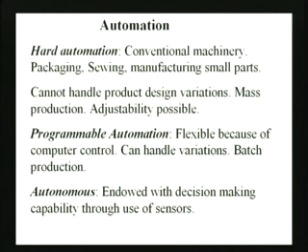These autonomous systems are endowed with decision making capability, and that is a very important thing. You would like the machine itself to take a decision rather than a human being continuously interfering and resetting or changing whatever it is. If there is a fault, the machine itself detects and corrects itself. So, we have slowly reached this high level of automation, and we are tending towards living beings.

Animals have a certain degree of autonomy. When they move around, they see food, they move towards it; they sense the presence of food or a threat through several ways, through sight, through smell, and so on. And they react to the environment and do what they desire or what is best for them at the given moment.

Perhaps the most autonomous capabilities are possessed by human beings. They are the most advanced in terms of autonomous capabilities. We think and we react, and we can change our actions, we can plan new actions. This is the highest level of autonomy which most of us encounter. Now, where does the robot fall into this? Many people seem to think that robots are like human beings. It is not really so.

We can develop machines which can be autonomous like humans, but do not reach the same level of autonomy. This is because there has been tremendous development in digital electronics and a lot of development in sensors. The marriage of these devices together has made it possible for us to now come out with autonomous devices which are many a time called robots. There is no definite definition of robots.

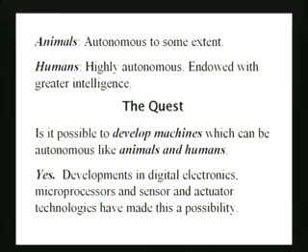I shall now show you a short clip to indicate to you how much autonomy is possible when we have a marriage between electronic systems and mechanical systems. Let us have a look at this particular clip.

Here is a two-wheel machine which is balancing itself. This has been built by an IIT student, and this particular machine uses gyroscopes in order to balance itself. What is the utility of such systems? Such autonomous systems can be used to undertake hazardous tasks.

Painting on the shop floor is a very hazardous task, because you are handling toxic material and it is injurious to the health of workers. Welding is a hazardous task, and also welding is a difficult task. The human being, if he has to weld two pipes together sitting on one side, he has to weld all round the pipe, whereas he is able to see only one side of the pipe.

Then loading and unloading jobs from a press or from a lathe is a tedious repetitive task. This is one more place where robots come in and can handle them with ease. Assembly operations. For example, when you assemble a chip, you have a very fine wafer, silicon wafer, to which you have to solder very fine wires. Lot of precision is required.

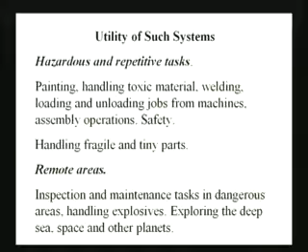Yet another reason for use of robots is safety. When they are handling dangerous material, chemicals, biochemicals and nuclear material, safety is paramount, and robots can handle this material with ease, with smooth operations and repetitively without fatigue, and so safety is promoted.

I have already spoken to you about handling of fragile and miniature parts, fragile parts like vials of medicine. These require careful handling, and that is one more place where robots come into the picture and can do the task with much ease.

Further, you must have all heard of exploration of planets like Mars and others like the moon. Here we need devices to move around, gather samples, do tests and so on. When you want to operate in such remote areas, it is very easy to use robots and undertake the task.

Even for terrestrial applications, there has been recently use of robots for exploring volcanoes, for exploring remote heights in inaccessible places in mountain ranges. All this has been done by robots, or underneath the sea. That is another place where you are all familiar with the Titanic and how the wreckage of the Titanic was surveyed by an underwater robot.

Okay. Now, we have seen all these things. Let us now go over to a few of the tasks I have mentioned. Here I show you a picture of a robot painting a car. The car is sitting on the conveyor. The car does not stop for the robot to paint it. The conveyor moves at a very slow speed and the robot keeps painting it.

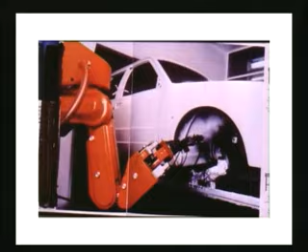You get a uniform coat on all the cars on the conveyor, because the robot has been properly programmed. It repeats the same thing over and over again infinitely. Okay. So, that is one of the reasons why robots are used, in order to get uniform quality and good quality. Let us see a picture of a painting robot. You can see the painting robot painting a car here.

Notice that these painting robots have a high degree of flexibility, in the sense that they can maneuver inside through the window of the car and paint the roof of the interior of the car. These robots can do it with ease.

A worker who is required to do this will have to carry a heavy painting gun, will have to mask himself to keep the toxic gases out of his breath, and there is always the hazard that there would be a fire. Now, painting robots are special in the sense that they should be able to ensure that no fire breaks out when they are acting.

What is the status today of these robots? There are what are known as industrial robots. That is the one like the painting robot you see. There are robots similarly in industry which load and unload what are known as presses. These are very hazardous tasks.

In a press, when a sheet of metal is introduced, there have been many accidents where the workers' fingers have been injured by the moving ram of the press, which sometimes comes in, and the worker forgets to remove his fingers in time from the loading point and gets them crushed. There are medical robots which help a surgeon undertake intricate surgery.

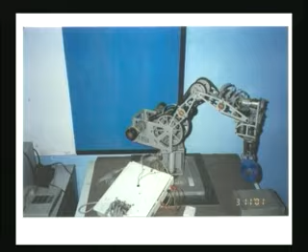In a servo motor the same thing is done by having what is known as a feedback. There are encoders here which provide you the feedback, and as you notice the motors convey their motion to the various joints through a set of chains.

As we go on, we will see how this particular device works. I will now show you a short clip on this particular device. Let me just show you how this device can be used to transfer the contents of one glass into another. Now, it is a clip which runs on for about 1.5 minutes.

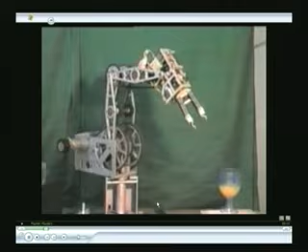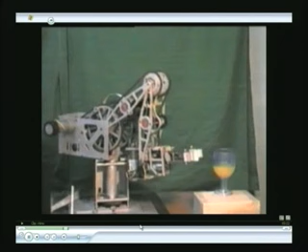You can see the robot, you see the various motions. The robot has got 2 fingers. You see the robot has approached; you have got a glass there containing orange juice. The robot is picking it up by the stem. It is now lifting it up. It is turning around towards us. You watch it, it will turn.

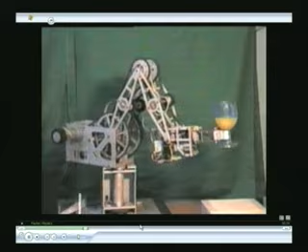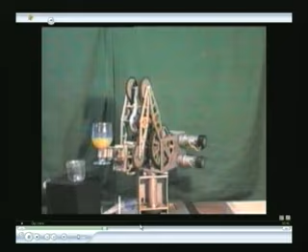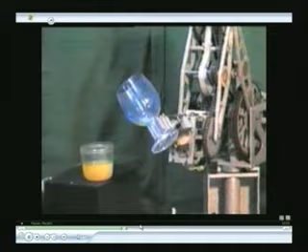It is stretching its arm, goes to that position, then turns, and then it is emptying this orange juice into another cup very slowly. It does not want to spill, and you see there it has completed emptying the orange juice into another cup. Now, it is returning the stem glass to its original place.

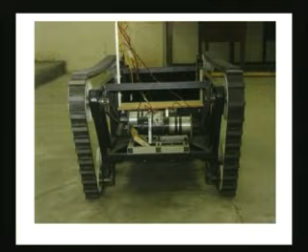So, apart from these robots, we have got what are known as mobile robots. I show you here the picture of one mobile robot, which is a tracked vehicle which can explore uneven terrain. As you can see, a couple of motors driving the tracks through chains. Here is another view, you can see the battery.

All robots more or less are required to carry their power on board. They are not connected through wires to a land source of power in the laboratory or in the industry. Mobile robots invariably have to carry their source of power on themselves. Robots which are stationary, like the Rhino I had shown you, could be powered from a stationary power source, but not mobile robots. So, whenever one designs these mobile robots, the ability to carry a lot of power in a compact package becomes a limiting factor.

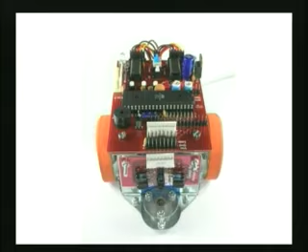Here is another little robot which can follow a line on the ground. This has been built by one of the companies established by our students. This robot can follow a line which is drawn on the ground. You have a white line on the ground and this robot follows it. Whichever way it is, you can draw a figure of 8 and the robot would follow. How does it do it? It does it through a set of sensors which allow it to sense the position of the line and guide the robot accordingly.

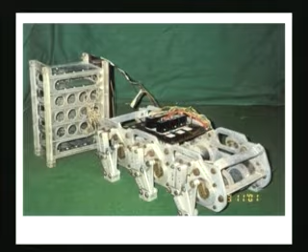Here is what is known as a walking device. Earlier I had told you that walking robots can cross over obstacles, can cross debris wherever there has been an accident, something which a wheeled robot cannot do. Tracked vehicles can, but supposing a tracked vehicle is asked to step over a pipe at a height of maybe 2 feet from the ground without damaging it, a tracked vehicle will not be able to do it. It will damage the pipe, whereas a walking device can step over the pipe and walk off, just like a human being does. Without damaging a pipe, I can cross a pipe.

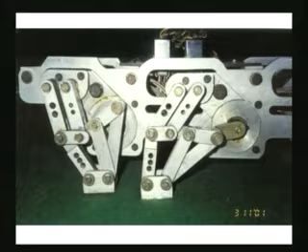Here is one. This is one of the earliest walking machines built in our laboratory here, and it has what are known as single degree of freedom legs. You can see the leg, it is a mechanism. What this mechanism essentially does is permit the leg to lift itself up, throw itself forward and come down. So, it was a single degree of freedom leg. There were 6 legs in the machine, 3 legs on this side, 3 legs on the other side, and it had limited capability because it had single degree of freedom legs.

The legs were driven by stepper motors, so we could control them. When one leg is moving in the air, another leg is stationary. Watch how you walk; you will notice that when you lift and throw one of your legs forward, the other leg is stationary. In the case of these 6-leg robots, we have 3 legs stationary on the ground at a time to provide a tripod support, and 3 other legs are thrown forward, thereby we achieve stability.

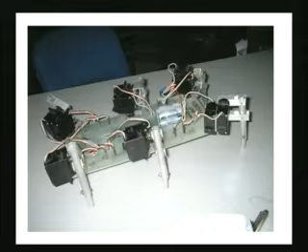Another robot where we have a leg with 2 degrees of freedom, a little bit more freedom than the previous leg. You notice this robot also has got 6 legs. Again we are aiming at static stability in order to keep it stable.

There are 6 legs. You can see the black boxes there. These are the servo motors which drive individual legs. Each leg has 2 degrees of freedom. So, 2 servo motors are required to drive the leg. Now, what do I mean by 2 degrees of freedom?

Look at yourself. You can move your shoulder and your elbow. You can move this up and down and your elbow up and down. You need one motor here, you need one motor here. Similarly, when you lift your leg, you need a hip joint, and you need a motor at the hip joint, and you also need a motor at the knee joint. So, this particular robot has got something similar. Okay. Now, we will see.

This robot is shown carrying a camera on the front to go around and survey places where there has been a little damage. We use this as a laboratory robot for our experiments, and it did work successfully. It could see and locate objects with the camera and move towards them.

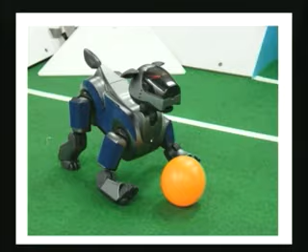Here is a very sophisticated 4-legged robot. This is the Aibo built by Sony Corporation. In its nose, it has got an infrared sensor which can detect the orange ball out there. Then it has got sound sensors which can receive sounds, and it can determine from which direction the sound is coming. It has many other sensors built into the system in order to enable it to behave almost like a real puppy.

This picture shows the Aibo playing football. The ball is colored orange in order to identify the ball to the Aibo dog. It is a very popular one, and it is now being used as an entertainment pet by senior citizens.

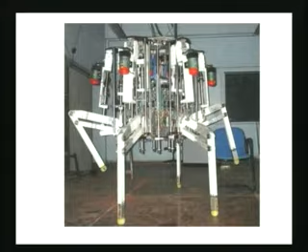We now come to one more robot which has been built here at IIT Bombay, the 6-legged robot called Natraj. This has 6 legs. Unlike the previous robots which also had 6 legs, these 6 legs are disposed around a circle, as you notice here. You see, there are 6 legs. So, we have them disposed around a circle, and you can notice that there are red colored units on the robot. These are the actuators which actuate individual legs.

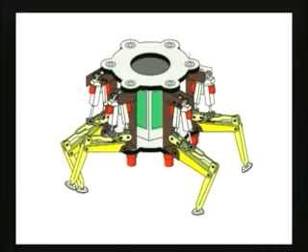Each leg has 3 motors. As you can see here, the red colored, these are the motors. Each leg has 3 motors, so 6 legs makes it 18 motors. In the central portion is the electronics in the central well. There is also a 486 computer sitting in the central portion, which synchronizes the motion of all these 18 motors in order to arrive at a particular way of walking. That is what we have done with our Natraj robot.

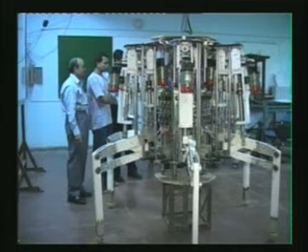I will now show you a clip of the Natraj robot. You will now watch the robot walking forward and backwards. Here you will see, here is the robot. You can see the size of the robot in comparison to the humans around them. You can have a look. You can see the motors, the red and green ones are the motors, then there are ball screws which are used, and then we have all these.

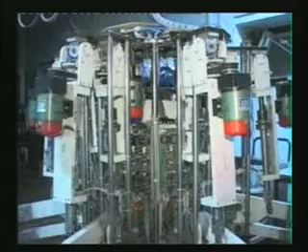Now you can watch the walk. You can very clearly see the robot lifting up 3 legs, throwing them forward, okay, in order to move. The front 2 and the rear 1 leg, it is moving. It is a very slow motion because the robot is very heavy. This was the first walk it took. I am showing you the video of the very first walk the robot had taken. It has taken about 2 steps, it is taking a third.

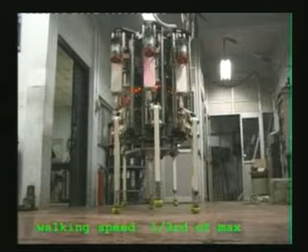You can see the lights from the electronics, the LEDs on the central electronics in the central well, which are controlling all the 18 motors simultaneously. Notice that it is now walking backwards. So, this robot can climb because it has 3 degree of freedom legs; it can lift the leg up and climb any object. Now that we have seen all these types of robots, let us just summarize what we have seen.

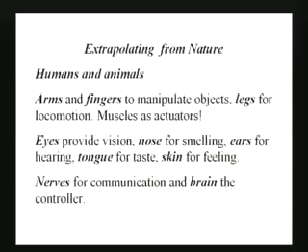When we extrapolate from nature, we find that there is an equivalence between humans and animals, and we are trying to imitate their abilities. That is what we are trying to imitate, the abilities of the humans and animals. For example, we have arms and fingers to manipulate objects; robots have similar capabilities. We have legs for locomotion, robots have similar capabilities, and actuators are muscles.

In our case, we have electric actuators; there have been hydraulic actuators and pneumatic actuators in robots. Our eyes provide us vision, and we have cameras mounted on these robots. I showed you one little walking robot with a camera, which allows it to see various objects around it. We have, of course, many more additional sensors, like the ability to sense smell. Scientists are trying to develop equivalents for this, which could be used in robots. We can hear; robots can hear using microphones, convert the sound into something useful.

We have a tongue in order to taste food or whatever it is. One day, scientists hope they could come out with robots for a similar purpose, and we have some very surprising sensors like the skin, which can sense temperature, which can sense touch, a tactile sensing. People are attempting to come out with sensors of similar nature for robots, and we have nerves for communicating with the brain. There are electronic devices for communicating with the computer in a robot.

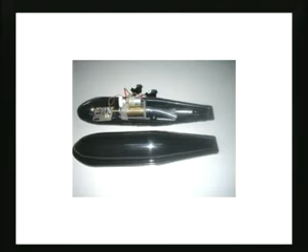Now, here I show you something which mimics fish, a submarine which goes underwater. This was built by one of our students. There is a small propeller which is not shown here, and it has some electronics which allows it to sense the quality of water in a pipe or in a tank, both on the surface and below the surface, and transmit this data to a land station. This is what we have built.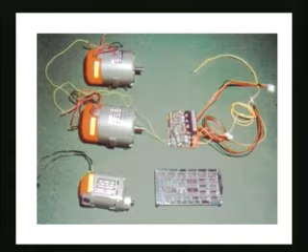Okay. So, having seen the various types of robots, let us look at some of the robotic components. Here are the 3 motors which we had used in our Natraj. We had converted conventional motors into servo motors. You do get ready-made servo motors also. In these motors, you have a feedback. Let us assume that the motor rotates through about 20 degrees. How do you know whether it has rotated through 20 degrees?

Obviously, a potentiometer will allow you to determine how much the rotation has been. You can always measure the voltage output of the potentiometer and determine it. Such devices are incorporated into servo motors, and together with the assistance of the 2 electronic boards which are shown, one can command the servo motor to rotate through the given angles, and so on. So, here are examples of servo motors. You will be seeing this as you go along in the course. Here is the leg of the robot.

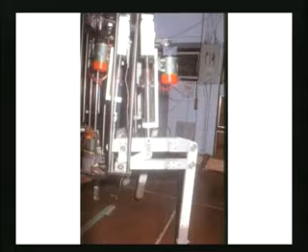You can see the 3 motors of the Natraj robot which we had built. You can see the 3 motors clearly, they were reddish looking ones. These 3 motors are the servo motors I had mentioned and shown you in the earlier slide, and these 3 serve to move the foot up, down, or to the side, left or right, or to the front or to the back. This is what these 3 motors are about.

So, you see you have an up and down motion which is provided by one of these 3 motors, a forward and backward motion provided by a second motor, and an ability to look to the left or to the right provided by a third motor. Okay. Now, for these 3 motors, we had designed a special mechanism for the leg, as you can see. This mechanism allowed us to decouple these motions to a certain extent, if not fully, and by commanding these 3 motors, we could get a variety of motions for the tip of the foot of Natraj.

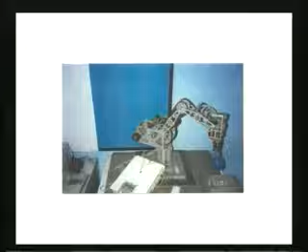So, here is an example of executing all that we know in robotics into something like this. Now, the leg and the Rhino or the other robot I had shown you earlier are somewhat similar. If you watch your own leg and your hand and compare them, the shoulder is equivalent to the hip and the elbow is equivalent to the knee. So, if you know how to design a robotic hand which will transfer objects from place to place, you also know how to design a leg for a walking robot.

Let me just show you a movie of the walking robot, the Natraj robot. The Natraj robot was built at IIT Bombay, as I had said. Here you can see it is a massive robot. You can see the various motors, and I am just repeating this in order to give you an appreciation of the size of the robot.

So, we have seen these robots; whether they are a robotic arm or a robotic leg, they are equivalent. Now, let us see how one is going to tell the robot what it is supposed to do. For the painting robot, one traditionally does it by what is known as teaching by showing, teaching by walkthrough, that is what we call it.

Whenever you have a child and you want the child to write the alphabet, what you tend to do is hold the child's hand and make him write the letter A or B or whatever it is. The child is holding the chalk, you hold the child's hand and lead it through the paces. So, this is called lead-through teaching. Now, this is typically used in painting. As you notice, a worker is handling the robot, he paints the car with this.

As the robot moves, there are motions at the individual joints of the robot; these are recorded, and when one replays them, you get the robot performing the same task flawlessly and repeatedly. If the worker has painted it badly, obviously the result would be a bad job of painting, but very skilled workers are used for this task.

They do an excellent job, and the entire motion of the various joints is recorded and replayed, and whenever a car comes on the conveyor, the robot automatically replays the particular program which has been stored, and painting is flawless. So, let us now go on to the next.

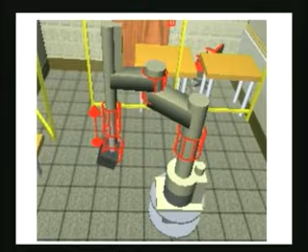All the motion parameters, all the parameters associated with control of the robot are captured, taken down to the shop floor, and the disk is fed to the robot on the shop floor, and the robot on the shop floor faithfully reproduces what has been programmed in the virtual world. The virtual world contains all the machines sitting close to the robot, all the loading stations, all the components. So, without much wastage of shop floor time, these robots are programmed.

Compare robots with nature. Manipulation: arms and fingers driven by motors and other forms of actuation. For vision, we have cameras. For hearing, we have microphones. For smell, they are yet to develop. For taste, they are developing. For feel, what are known as tactile sensors. For communication, we have wires, fiber optics and radio systems, and for brains, computers and microprocessors. This is what we have in robots as compared to nature.

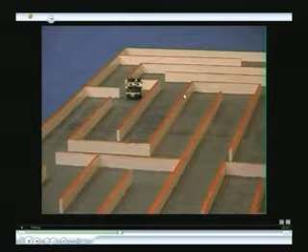Now, I shall close this lecture. In the subsequent lectures, you will learn more details about what are known as industrial robots and industrial manipulators. But before I do that, I will show you an example of autonomous capability. In this particular clip, you will see an autonomous robot solving a maze. It is going through the maze. You can see that. This has been built by one of our IIT Bombay students. Wherever there is a gap, it senses the gap and moves. You can see how it has gone from the edge of the maze to the center.

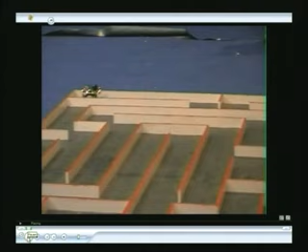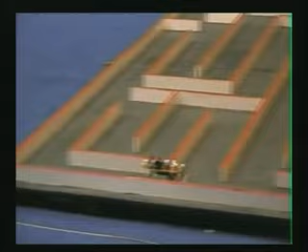I will replay it again. You can see this robot. Whenever it senses a gap, it moves. You see the speed at which it turns. All this requires very careful attention to mechanical engineering, dynamics, servo motor control, and artificial intelligence. He uses artificial intelligence to know where exactly the robot is going, and he captures the motions of the robot, the turns it has made, memorizes them so that the next time around it does not make the same mistake. It maps the maze and solves the maze second time around at a very high speed.

Such robots could be used to explore mines where you have no reference points in order to know where you are going. You can move around randomly first and determine a map of the mine, and use it to come back. So, such are the capabilities. This particular example is typically the capability of computer science and artificial intelligence married to mechanical engineering, the dynamics, because if you want to turn so fast, you have to really work out the dynamics properly, otherwise it will keep spinning on the spot.

Then electronics: you have to sense where the walls are. If there are ambient light changes, the sensors will not show you the exact location of the walls, because it may show you the wall across the gap rather than the fact that there is a gap here, all these factors. So, here is an example of several disciplines coming together into a successful robotic product and an autonomous robot. I think we will in the next class look at industrial robots.